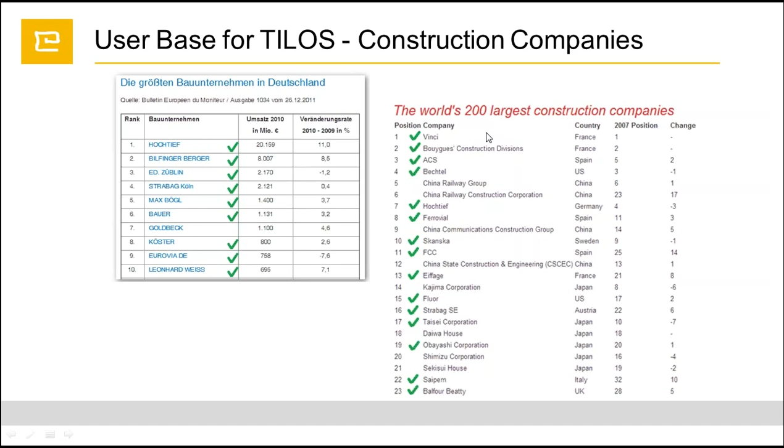We have companies like Vinci, Bechtel, Hochtief, Fluor, Strabag, and so on. So we have a Europe and Middle East customer map. As you can see, we have a lot of customers who have been using TILOS for a long time for their construction projects.

Also the Asia customer map. I see we have a lot of people from Asia and Europe attending today's webinar. We're very glad to see you here.

So, what are the characteristics of a linear project? Well, as we all know, a linear project has an axis where the work is being performed. So in this case we have pipeline, railway, highway, tunneling engineering, and transmission lines. One of the characteristics of the linear project is that we have a repetition of each activity.

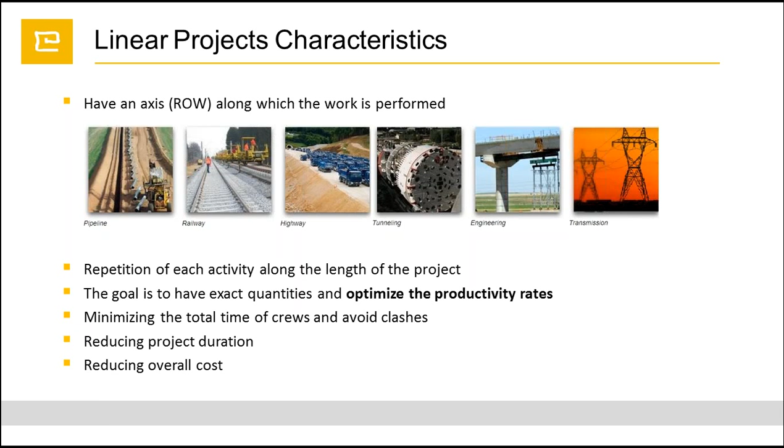So we have repetitive activities which go all along the project, and our goal is to optimize the productivity rate, reduce the project duration, and visualize the project area, which is very important. I'll give you more information later on, and reduce overall cost. Well, to which industry can we actually implement TILOS?

We can implement TILOS on all linear projects, such as transmission line projects, highway, road and bridge projects, railway projects, pipeline projects, high-rise buildings, metro and tunnel projects.

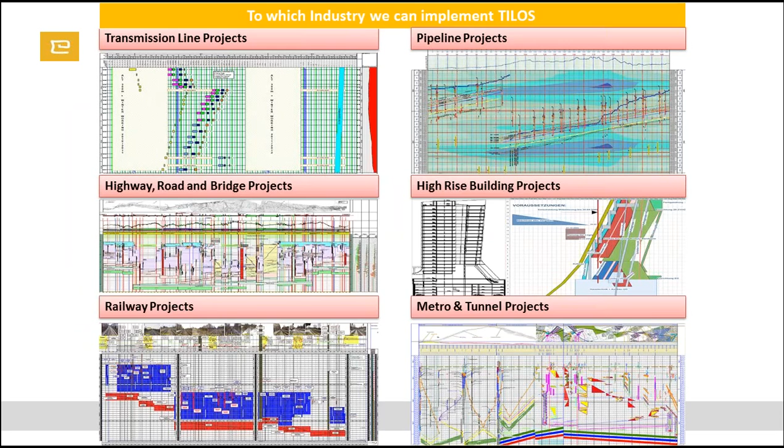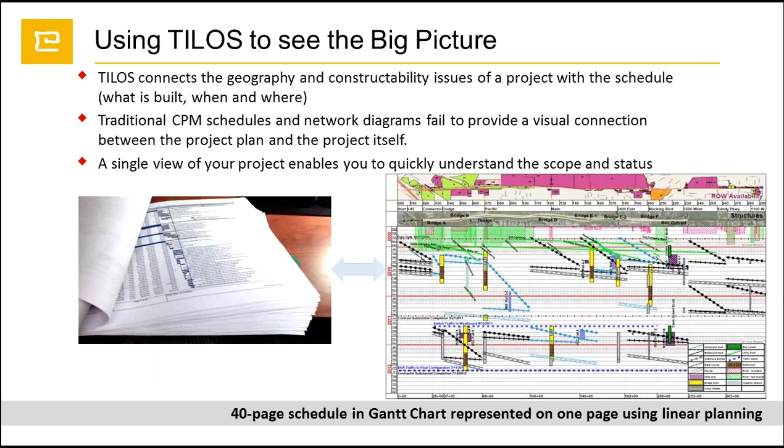One of the biggest advantages, as I mentioned previously, is the visualization of the projects and the reporting. If you can see on the left side, we have a traditional CPM plan and report, around 40 pages, and everything we have in one page in TILOS. So in TILOS, as the Europeans call it, we have every information in a single page.

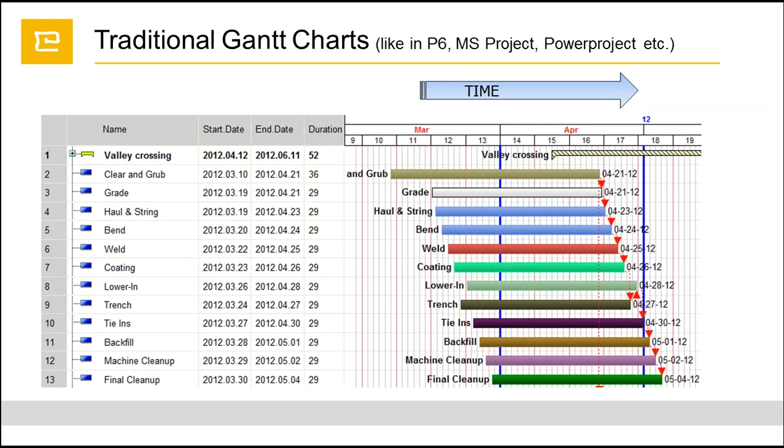Okay, I'll give you the main idea of how we can analyze the TILOS reports and how we can prepare the work. In this slide we have a traditional Gantt chart where we have only one axis, which is time, like in Primavera P6 or MSP or Asta Powerproject. However, in TILOS we have a two-dimensional chainage, which is first the distance axis and the time axis.

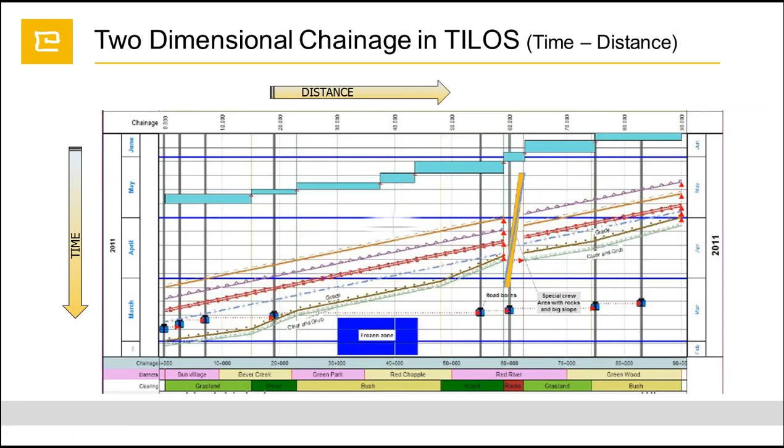So this way we are able to see where our activity is going to be performed and when. For those who don't know how TILOS works, I'll give you a simple example of how TILOS works, and later on we'll go more deeply into pipeline projects.

So we have here our working area where we have two axes. First is the distance axis - this is a 4-kilometer road project, let's say - and we have a time axis which takes 3 months. On top we have a graphical illustration.

So TILOS gives us the opportunity to enter the graphical illustration. Here we have the object, we have a road. For instance, we have a first intersection, second intersection, or crossing, then the river - so it might be a culvert or a bridge.

On top of it we have an elevation profile where we have a road level, where we have a cutting amount - starting from the 0 kilometer until, let's say, 1,700 meters, we have the amount where it should be cut, and the fill amount. So this is the elevation profile we can indicate. This is not graphical - this information is taken from the database where you keep this information. It might be Excel or another place.

So let's say we have first activities, which is the topsoil, and we are starting from the left side of the river, and it will start from 2,600 meters and goes all along to the beginning of the project, and this activity will take 3 weeks. So by this way we are able to see, for instance, when we'll be at a certain point. Let's say at 1,500 meters our activity will have to be done until almost at the end of the second week of August.

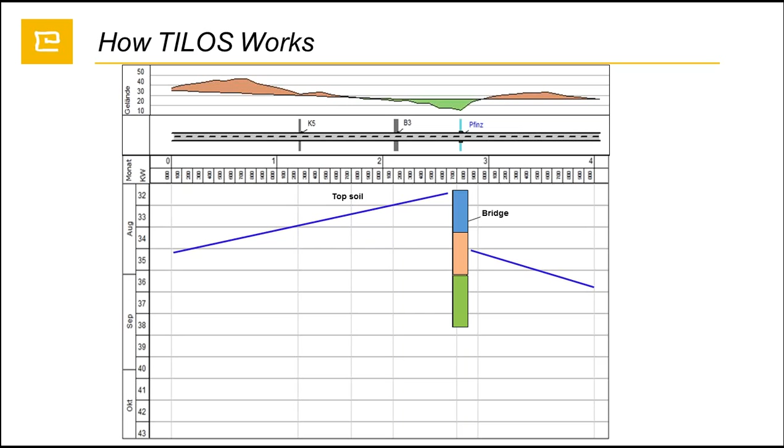Besides that, TILOS we can prepare beside the linear activities, we can do the structural activities as well. So we have here the bridge, and we can show it as a summary task, or we can show it as a detailed bar. So all the steps of the bridge we can indicate here.

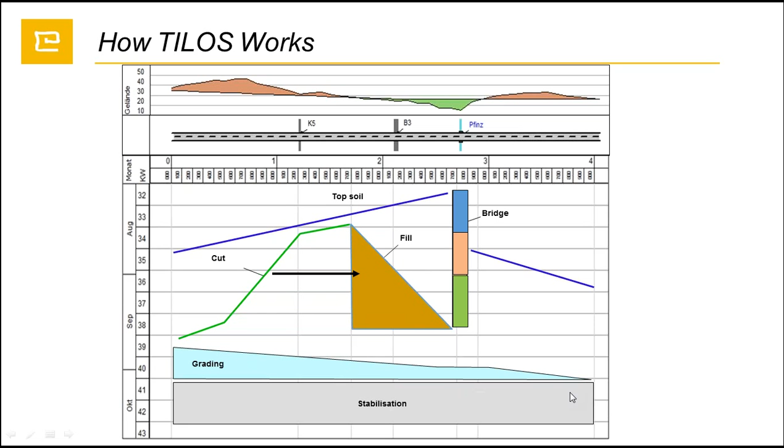So at the same time, we are able to put the hammock task. In this case, we are putting some rectangle here, which gives the understanding that we cannot perform any other work until we fill this area. So this area should be filled until we perform the next activities. And then we have a standard grading, which goes from the beginning until the end of the project, and the stabilization. So simply, this is how TILOS works.

Beside that, TILOS gives us opportunity on clash detection. So as you see, we have here the pipeline sample. We have an elevation profile, we have a distance axis and the time axis. In the middle of the working area, we have a restriction area, which we are able to put, so we cannot perform any other work during this time on this distance zone.

So let's say we'll have one activity, and we can see that there is a clash. This activity is starting from the beginning and ending at the middle of the project. Let's say not in the middle, not in the middle of this area. So we can see that we have here our clash.

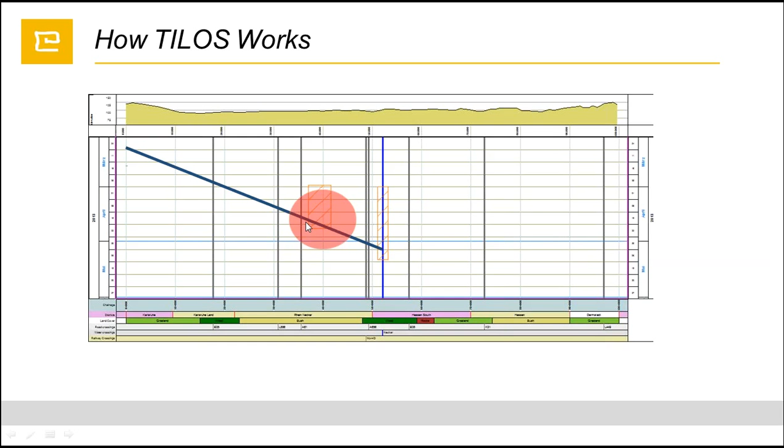However, we are able to, let's say where the project engineers or the project manager decide to postpone the beginning of our activity 1 week later, but as well we can stop our work, we can come to this point, we can stop, later on after this time passes, we can continue our works. However, we decided to just postpone the beginning of the activity, and in the same way we have a second activity.

However, if you look on TILOS, we can see that we have a clash. This is actually the clash detection option in TILOS, and TILOS does not give any options on how we can solve it. However, it's up to the user whether he would like to postpone this activity, whether he wants to reduce the work rate, or whether he wants to stop this activity.

So, moreover, we can give the lag, which actually the traditional CPM gives us as time-based. We can also in TILOS give the distance-based. So as you can see here, we have a minimum distance like a 2 kilometers lag. So between these two activities, these two activities cannot be performed closer than 2 kilometers.

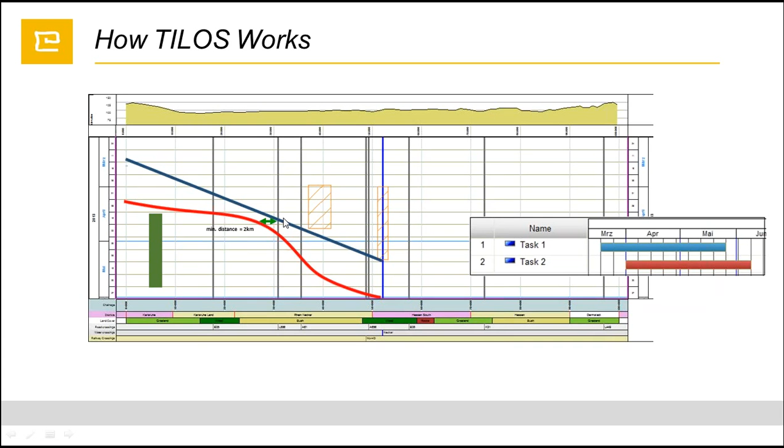Okay. The project controlling. So we have information that we have a clearing activity name, the date, the start date, and the end date, start distance, and the end distance.

Okay. So beside the linear scheduling, it's also available to give the detailed report on the progress. So as we can see here on this screen, we have the main activities. We have sorted main activities. We have a data date. Also the main activities for the grading, clearing, grubbing, grading. We have a progress dashboard where we can see the actual progress, planned, the quantity, actual quantity, all this editable, and we can put any information which we would like.

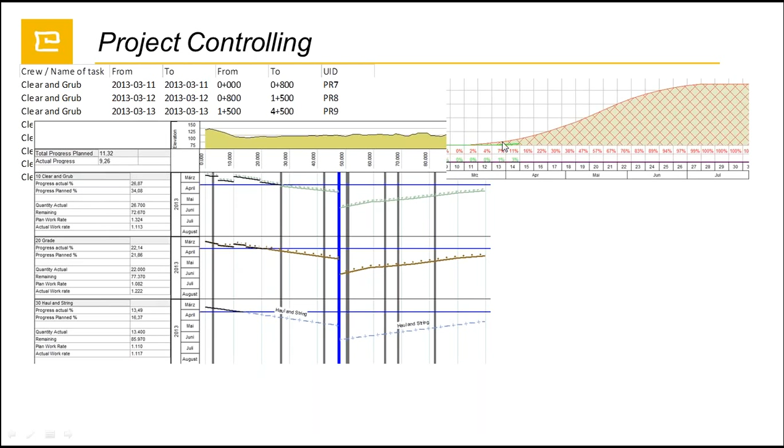Moreover, we are able to provide the S-curves, and we are able to provide the Gantt chart on the distance base, not on the time base, but also on the distance base. So we can see here the distance, and we can see here the information about our activities, which is the planned percentage, progress percentage, the work rate performance, any information which you'd like to see, we are able to display it in TILOS.

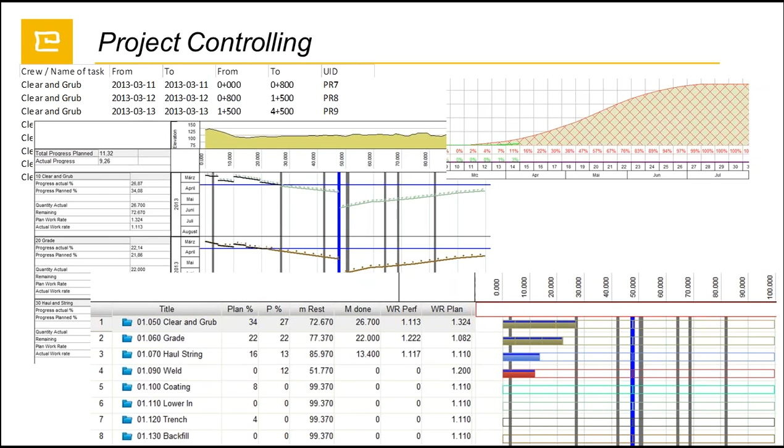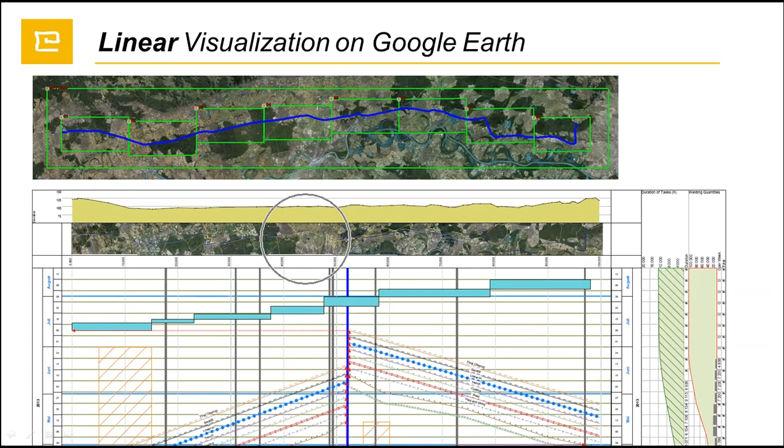Okay, as I mentioned before, TILOS has a GIS module, which is the Google Earth integration. It's called the TILOS Progress Map. We are integrating the TILOS application with Google Earth and getting the reports directly from Google Earth. So in this case, we would like to get the visual view of our project to our working area. So as you can see, we have a graphic illustration of our project on our TILOS working area, and we would like to see the progress.

So what is the progress monitoring on Google Earth? Well, it is the ability to see the progress, to see the visualization of our actual progress on our working area. So let's say we have a blue line, which is our right of way, where we have our working area. Below we have a TILOS working area. So we are indicating the main activities. So these slim lines are main activities, which go all along the project.

So let's say on Monday 22nd of April, our crew is starting working here, or our activities are going to be performed over here, over there. The highlighted parts are where our actual crew is working. Then on Monday, May 6th, we can see that our crew moved from this point to this point. So I'll just repeat it. We're able to see.

Okay, great. Beside that, we are able to show the cumulative way. So what we have here is two crews, which are starting from the beginning of the project and the end of the project. And we are able to see that the highlighted parts are actually performed parts. And we have the rest part where we will have to do our work.

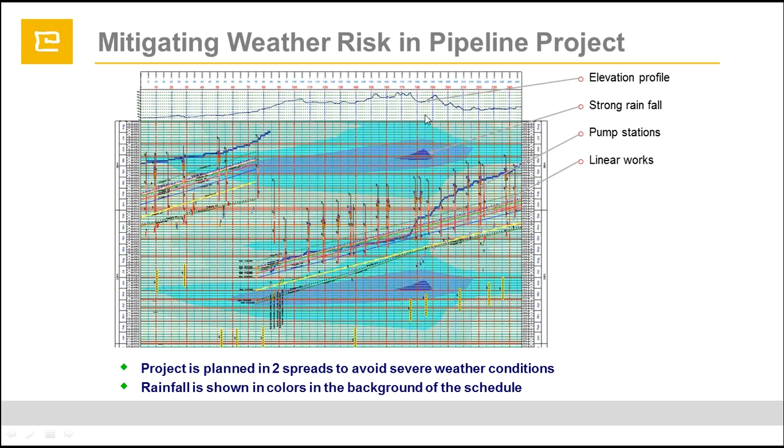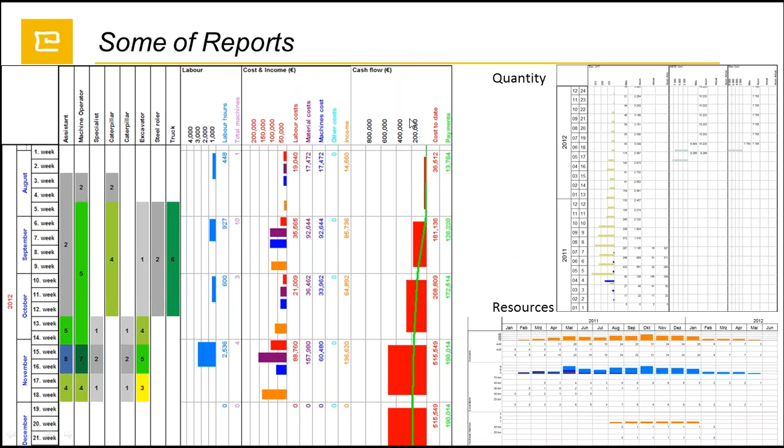Okay, beside that, we are able to show in one page the reports, the histograms, and reports such as the labor report, resource report. So this can be time-based or distance-based as well. So we have here the labor information, the cost and income information, the cash flow, the quantities, resource allocation as well.

TILOS has quite a good data exchange model. We are able to get data from the clipboard or from Excel. Moreover, we can get the information from the most used planning tools such as Primavera P6 or Microsoft Project or Asta Powerproject. So this way, if you are mainly using Primavera, you can use TILOS at the same time as well.

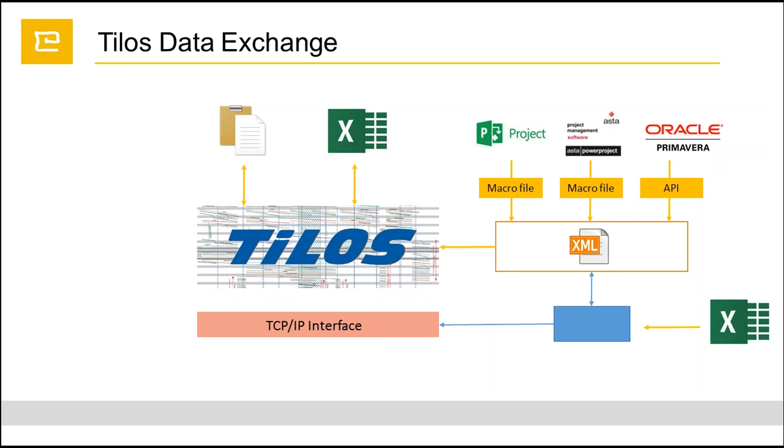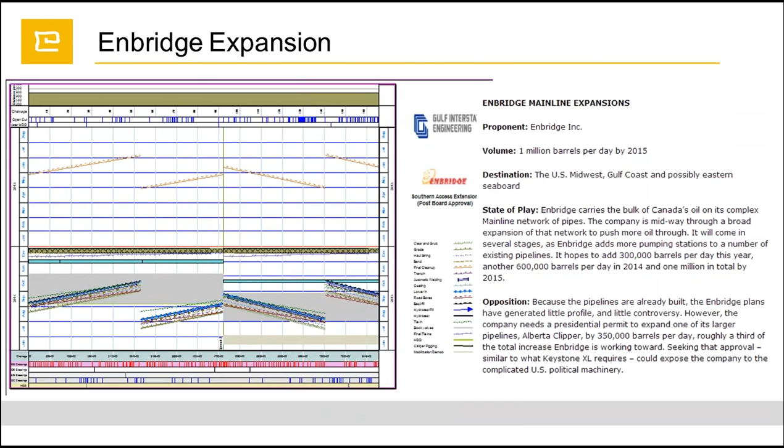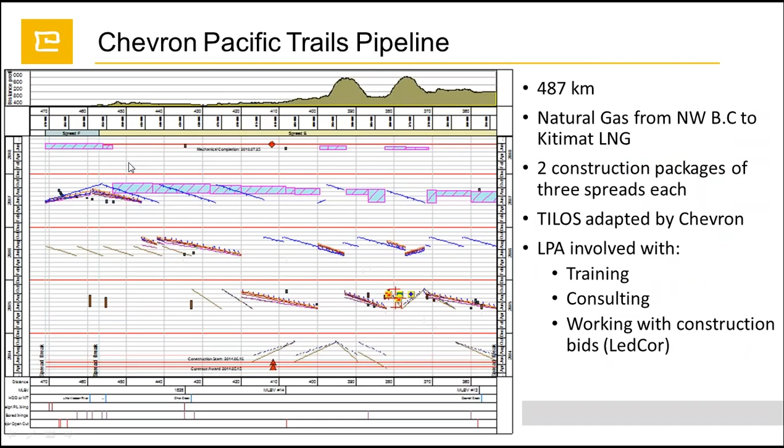Well, I'd like to show you some of the pipeline projects which are actually being used by TILOS. So this is the project which we are using. I'll give the short information, I'll just be going through it. So this is a pipeline project in Canada. We have an Enbridge expansion, the Chevron Pacific Trails pipeline. So as you can see, we have the distance and the time, all activities performed all over our distance.

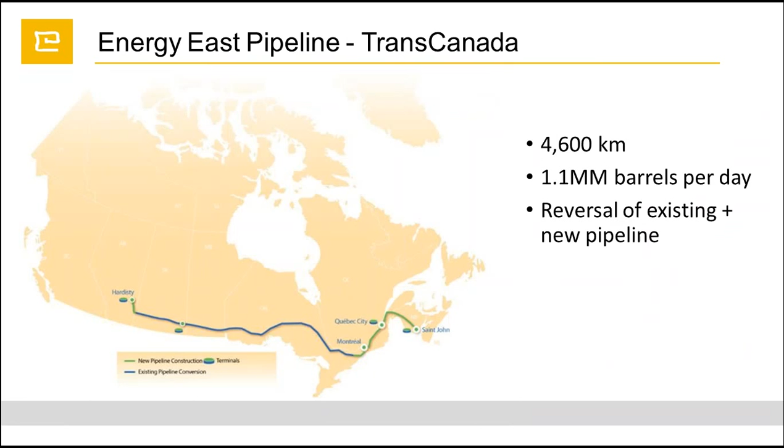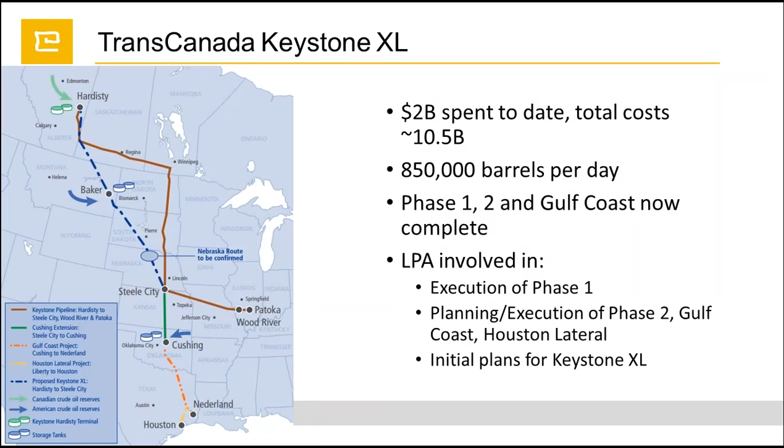We have Energy East Pipeline Trans-Canada, which is one of the biggest pipeline projects. And we have a Trans Mountain Kinder Morgan pipeline project, the Northern Gateway, Trans-Canada Keystone. Czech Republic, we have a Gazela gas pipeline.

Well, moreover, let me just give you the short information about in which project stage we can use TILOS. We can use TILOS in any project stage. It can be feasibility studies, overall plan, production plan, special studies, and also we can use it for pre-designing, for the tendering, for the planning, procurement, execution, or even for the claim analysis. And it can be owned by the owners, engineering companies, contractors, or the subcontractors.

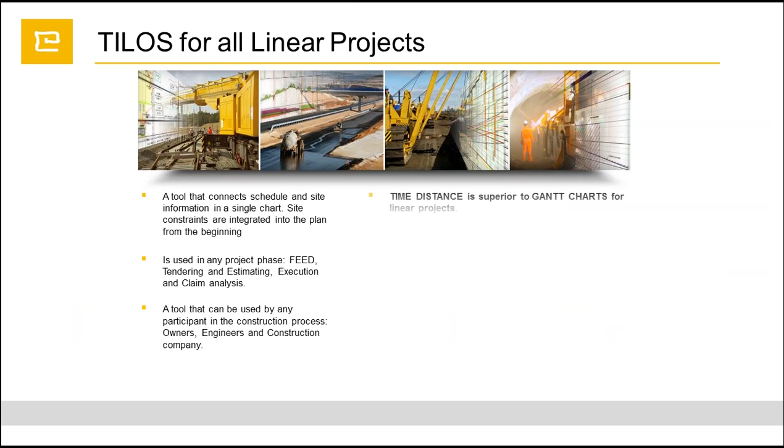Well, this is pretty much all about the first part of my presentation. Right now I'll switch to the demonstration part. Okay, so we have a TILOS interface, we have a ribbon, we have a TILOS Explorer for quick navigation. We have a properties bar below, and we have the main working area here.

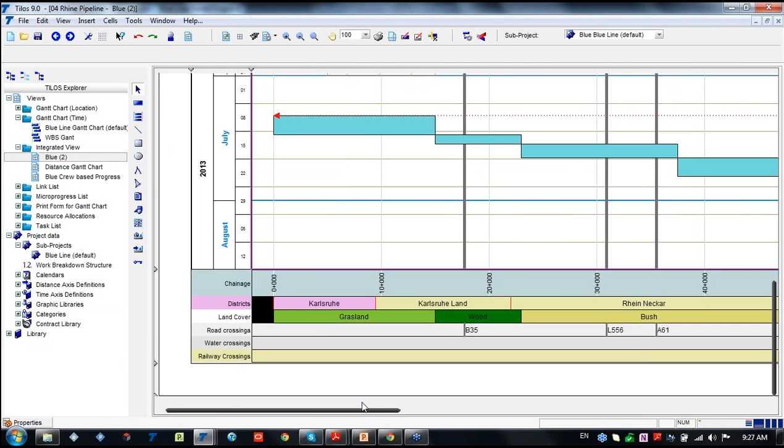So as we can see here, we have the elevation profile. We have a distance, which we can see is a 100 kilometers project. Then we have a time axis. Moreover, we are able to show the sectors, the districts, in order to make our work easier. Or for instance, if on the same project you have dedicated subcontractors working on it, we are also able to show it, so we can divide the works on the section districts. All this information is editable according to your wish or to your requirements.

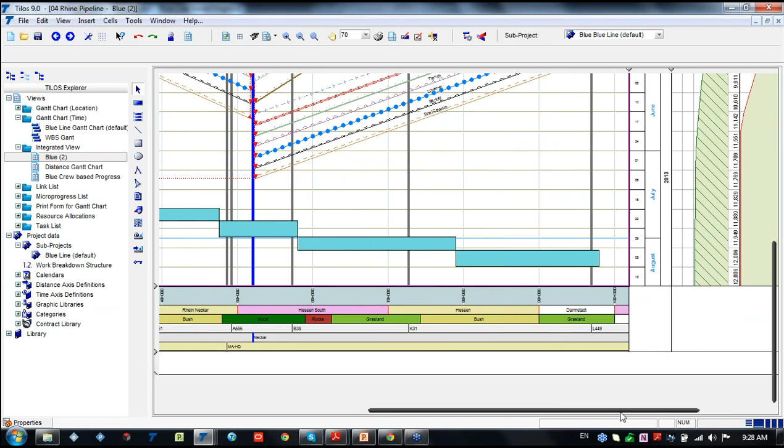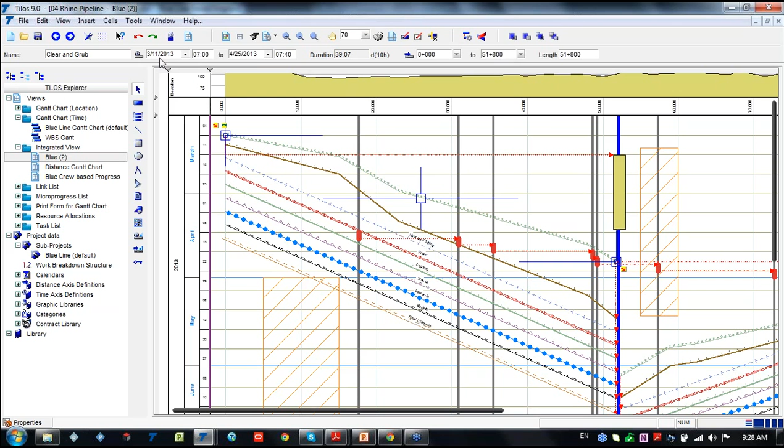We have a report, which is the duration of the task reports at the S-curve. Also the welding quantities here. It can be cumulative or not. So we have the main activities here first, which is the clearing and grubbing activities, and we can easily see from where to where our activity is going to be, the duration of the activity, the start date, the end date, even the hours. So on the properties bar, we're able to see more information, such as to which WBS it belongs, the task ID, which calendar it is using.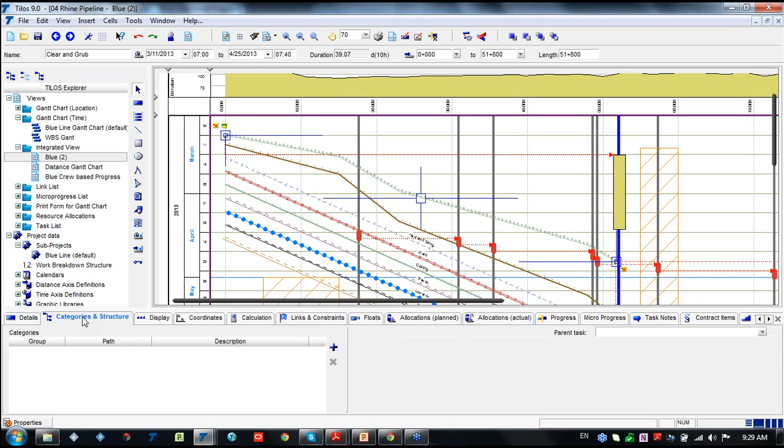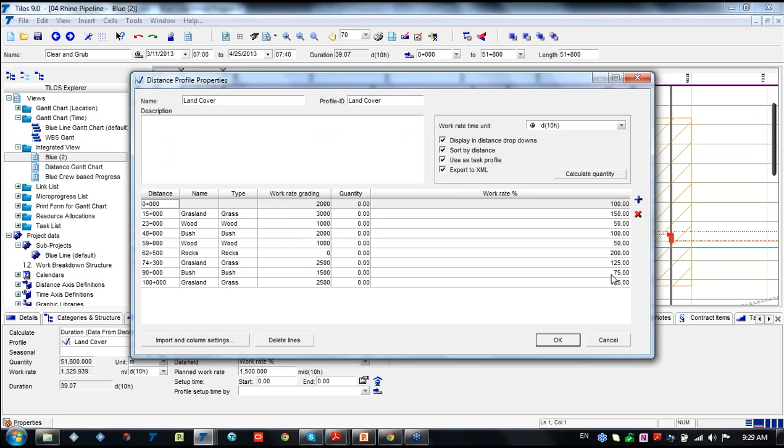The calendars are actually editable. You can edit your calendar according to your requirements. Then we have the categories and structures information, the display information. This is a task which we can actually edit. All these cosmetic works are done by the user. The calculation method, we have several calculation methods. So in this case, it's getting the information from the profile data, which is the Land Cover, and we have all information over here. We have a work rate, the quantity, the work rate percentage. Okay. This way, we are able to see the several calculation methods: work rate, duration, length, duration speed from the profile data, the duration from the distance profile, or from the sector profile.

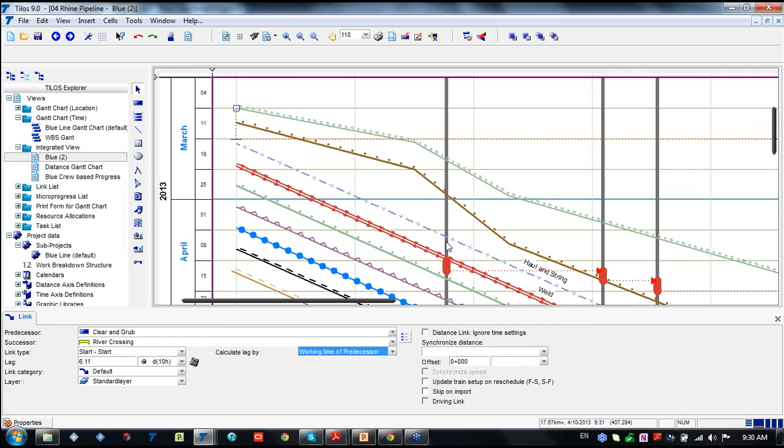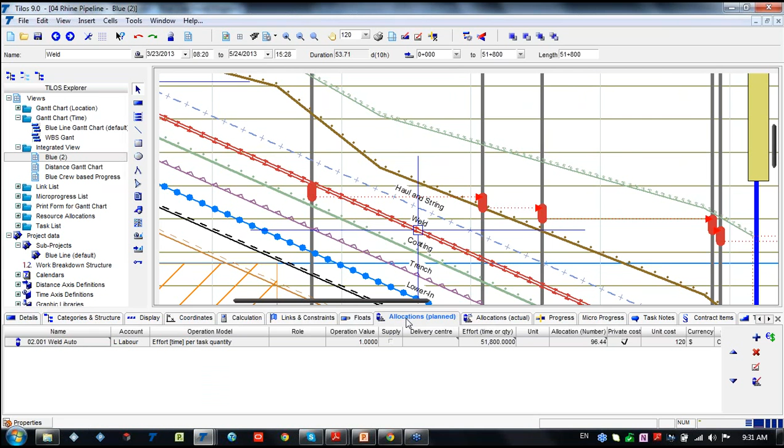The next activity is, for instance, the welding activity. We are able to see the coordinates as well here, not only from the top, but from the detail bar as well. We can see our allocation, resource allocation, actual. I'll show you right now. We don't have any actual, but I'll show you the actual one. The progress methods, some of the progress methods, such as percent split, the quantity split, the distance split, the task steps, percent simple, quantity simple.

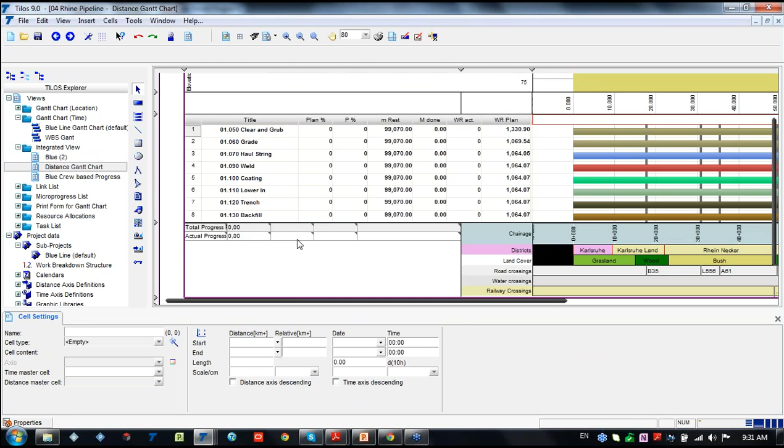Beside that, we have a traditional Gantt chart, but this time which is distance based. So we have main activities, or any activity which you'd like to show, no problem, it's possible. And we have our activity. Also, we have indicated here our sector profile and the progress, but this time we don't have any progress, and I'll show you in a minute the same project with entered progress details.

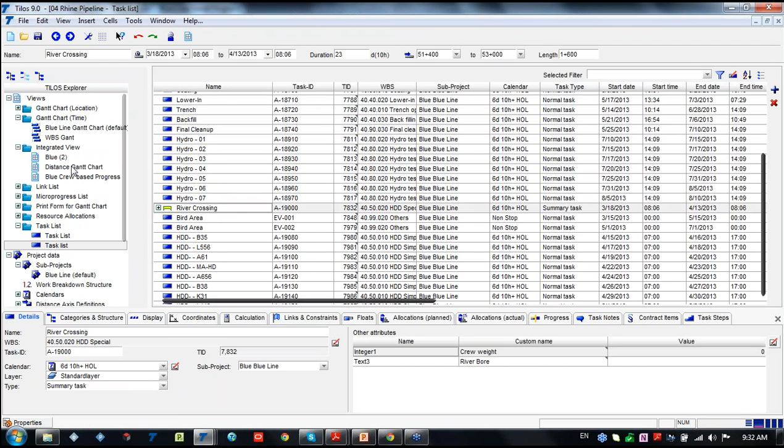So main task list, we're also able to see our task list here. If we have any WBS or summary activities here, we're also able to show it. The summary task on our time distance area looks like this. So this is a river crossing.

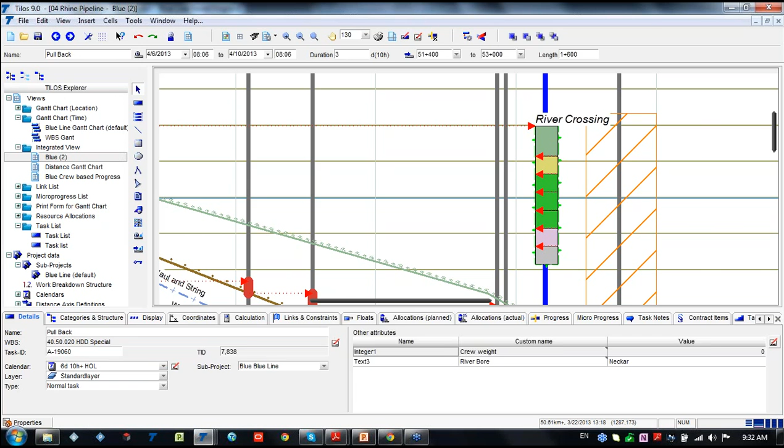Okay. So once you would like to see the detailed information, we're able to see it. So for instance, right now, this is mobilization activities, this is pilot hole, reaming, and so on. So once you don't need to see it, you can just, oops, not that way. You can just switch it off, or hide it if you would like to.

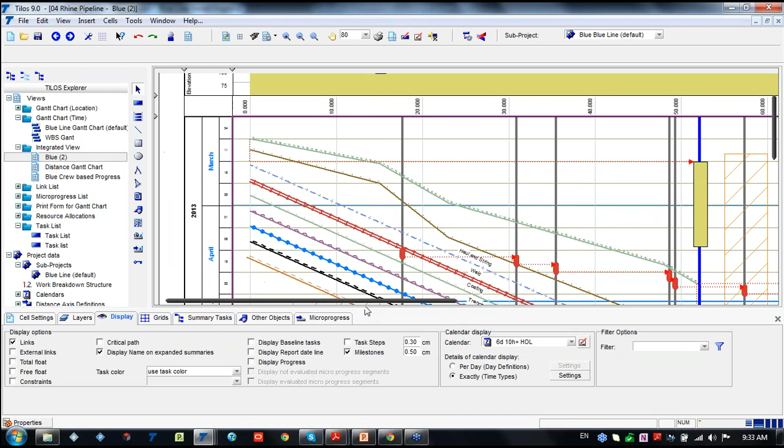Okay, let me show you right now the example with the progress entered. So as I've showed you previously, we have a dashboard here. We have information about the activity. We have entered our activity. We have a data date here. We have entered our baseline and the actual information.

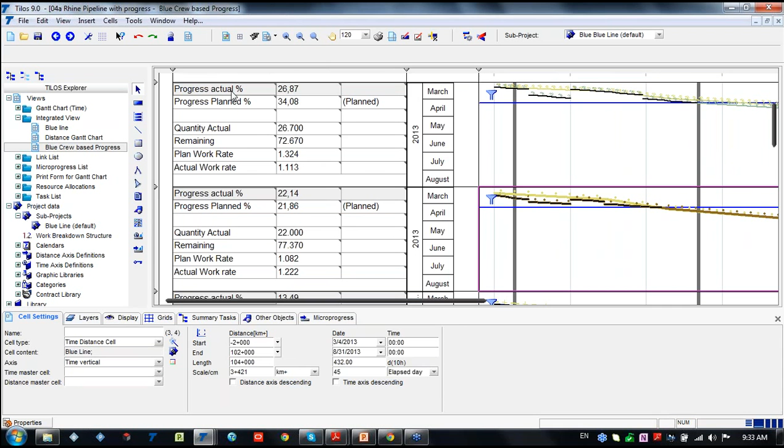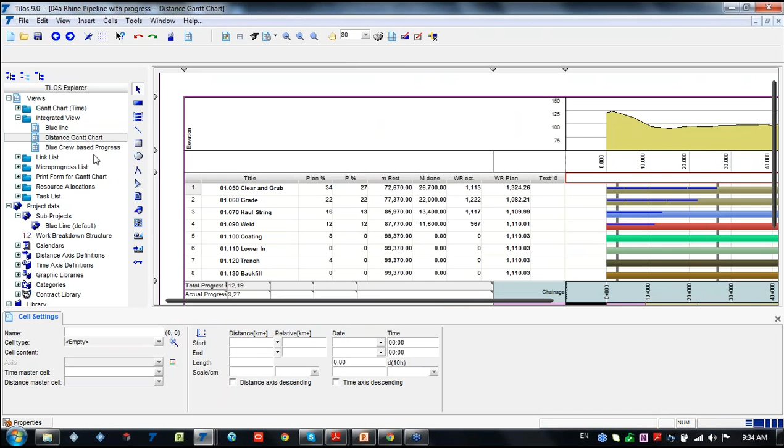So by the dashboard, we're able to see what is progress actual, progress planned, then the quantity actual, or the remaining part, the work rate. So all information is available in order to prepare good planning or scheduling. On a distance Gantt chart, all this information is shown simultaneously. For instance, let me show you how it actually works.

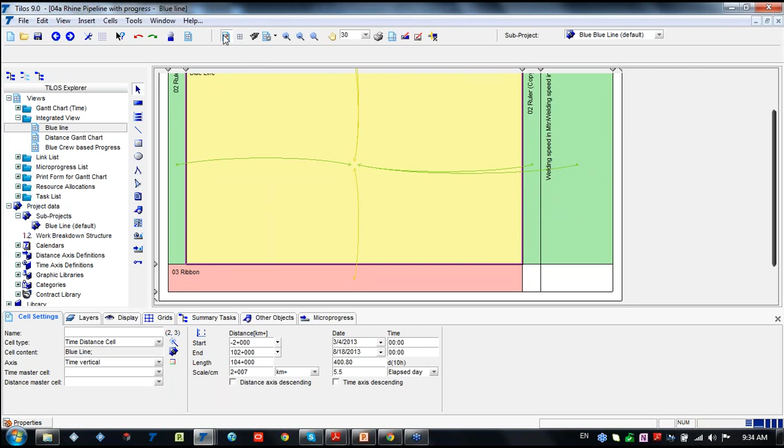All right, by this view, we are able to see that all the information which we are entering on our working area is synchronized with the elevation profile, with the data, with our histograms. So if you change any information here, for instance, it will also be changed on our Gantt chart.

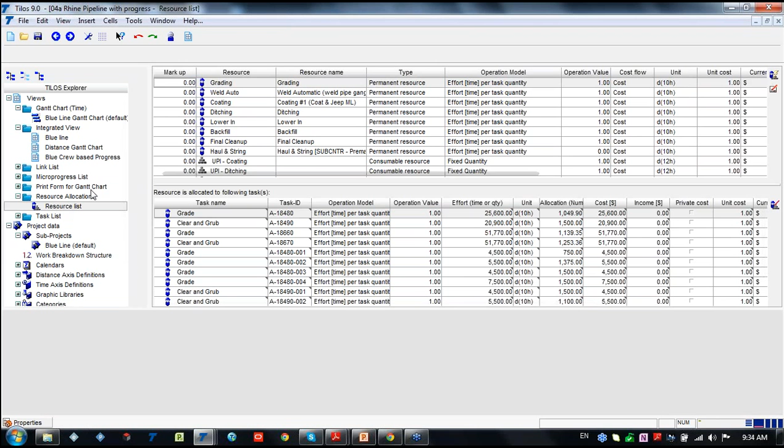Besides that, we have a traditional Gantt chart, which is time-based. Okay. We have a resource list. All this information as well we can edit. This is up to you. The calendar information. We have calendar information. We can indicate the non-working times, some exceptional days such as holidays.

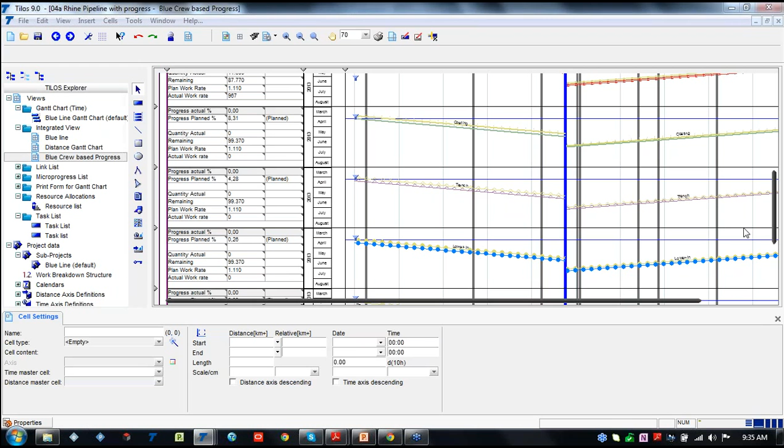Do you have any questions until now? Okay, I see no questions here, or you're still typing.

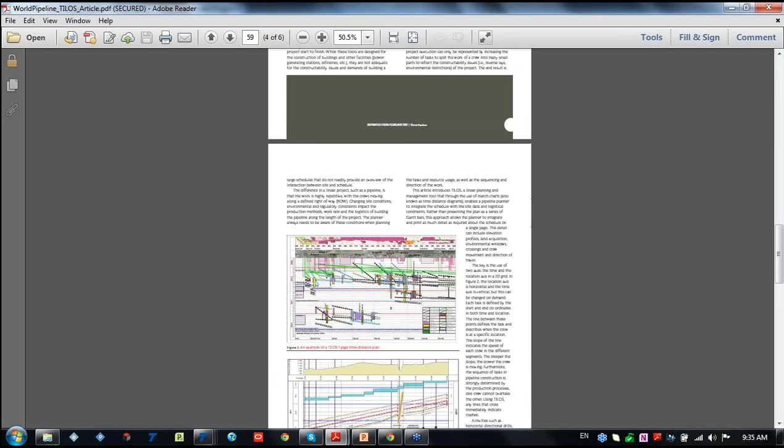Well, TILOS was introduced in the World Pipelines magazine. So if you would like, we are able to share it with you in order for you to have some understanding why we are using TILOS in pipeline projects.

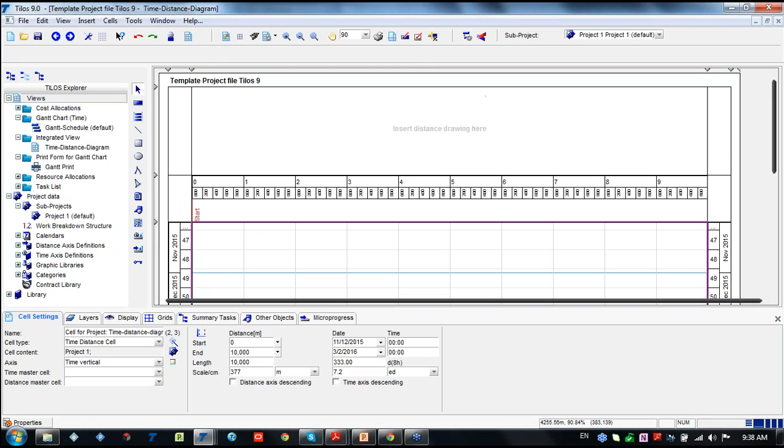So what we have here first is a general template where we have already predefined the distance according to how we set it up. So it's starting from 0 and it ends at 10,000 meters. We have a time axis on both sides. We have a legend here.

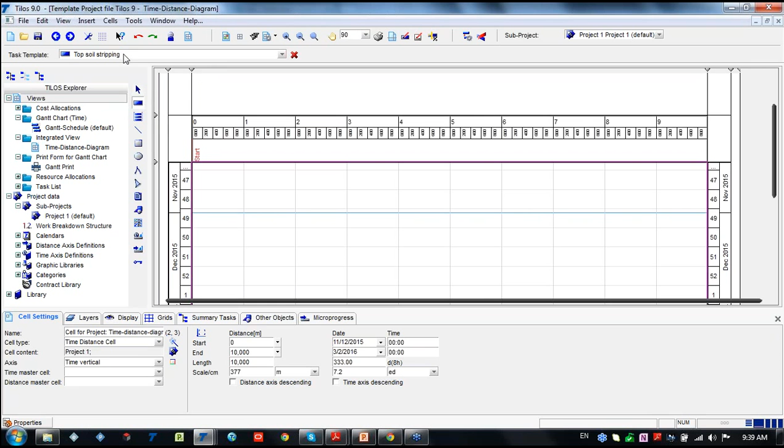So the question was how we can add the activities. We can add the activities by clicking on insert task, or we can even insert a task group. So if you have a repetitive activity, for instance, let me first add the task. Once we've added the task, we can select the task over here.

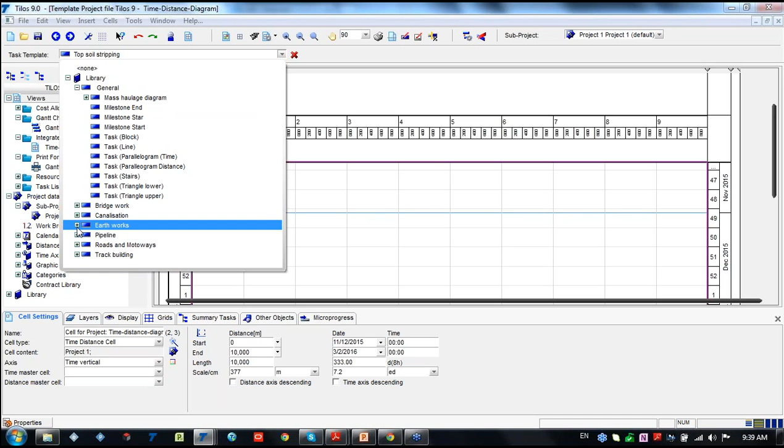We have a task library. This library we actually have from our template, but you can edit it, add to it, remove from it, or adjust it as you like. So let me choose from the earthworks, let's say the topsoil stripping. By dragging my task, I'm able to insert my task.

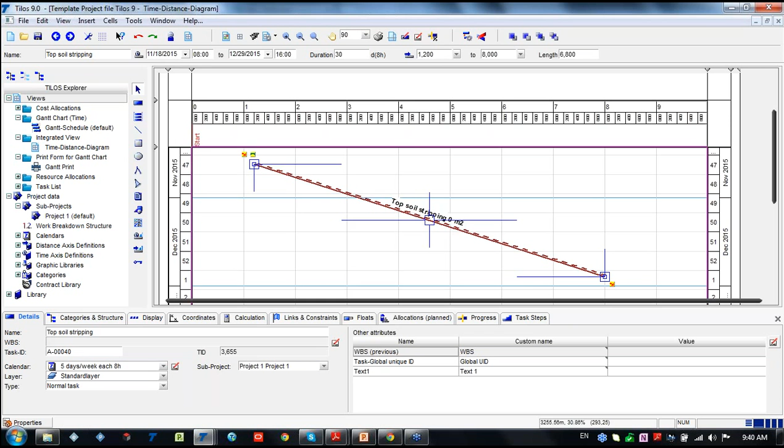Besides that, all this task information, like the duration, can be 30 days, so it will adjust automatically. Or, for instance, starting not from the 0 kilometer, but from 1,200 meters. So all this information is editable, or we can even change the end date. It might be in February 2016.

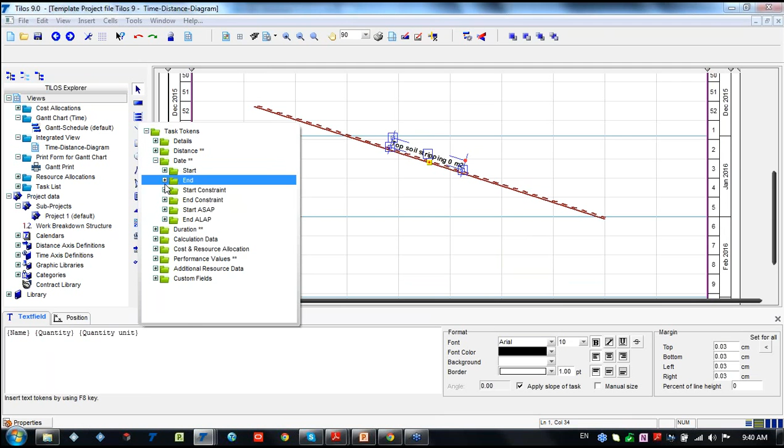Okay, so what we have here is the information about the task. The task annotations are also editable. These task annotations can be about the quantity, if you have any quantity on your task. It can be the name, the end date or start date. Let's say we have the end date as the schedule.

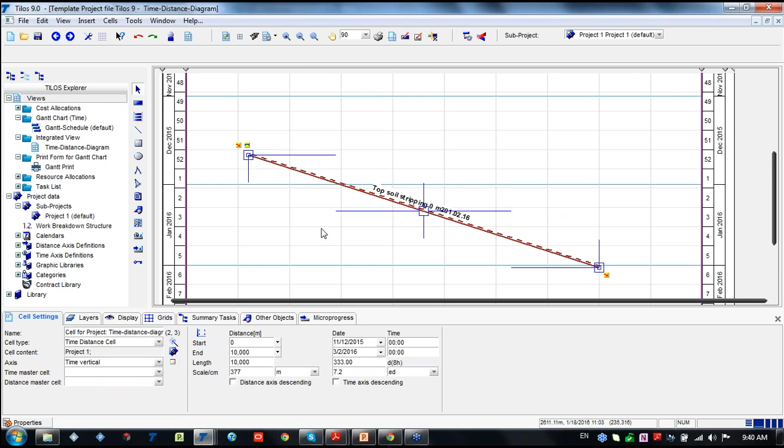Okay, so right now we have an end date, so it will end on the 1st of February 2016. Then we have, as I said before, task groups. So once we would like to enter the task groups, let's say we have a predefined task group. It can be the path, it can be a canalization task group, and we would like to enter it as, let's say, the distance profile.

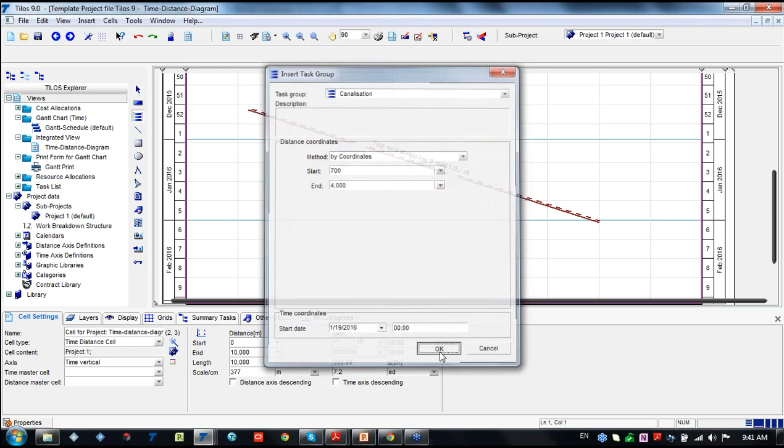So in this case, we don't have important location points, so we'll not use the distance profile, but we'll use coordinates. So let's say we're starting from 700 and we'll end at 4,000 meters. Okay, so once I've entered it here, where I have task groups, I can edit it, I can remove it. It's all up to you how you would like to have them. Okay.

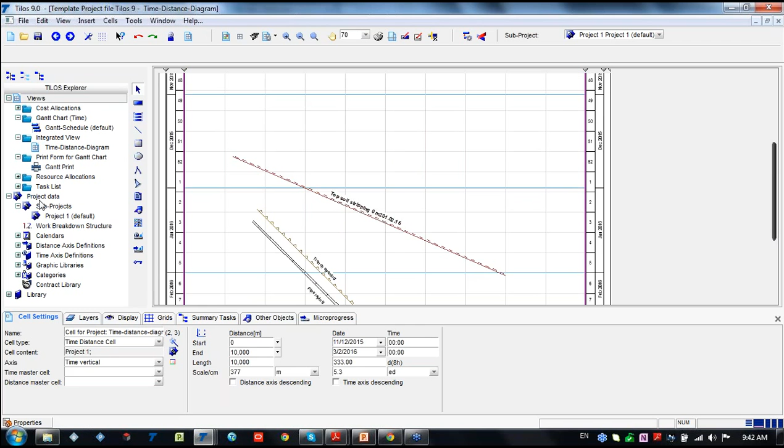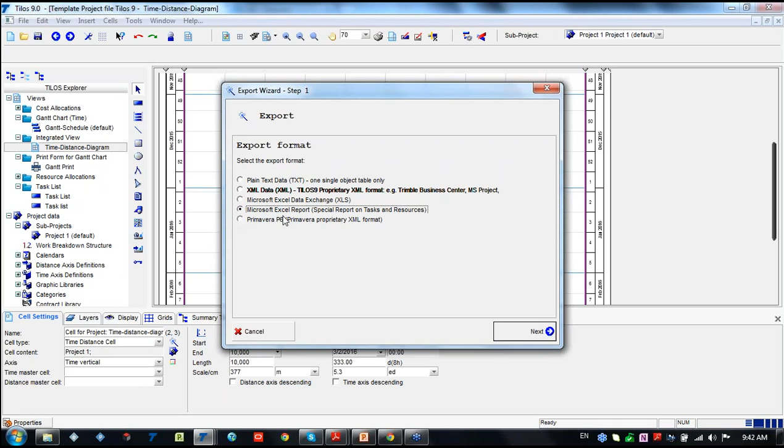Mr. Ibrahim asked me how we can export the information to Excel. We can export it via File and Export. We have options to export as Primavera XML, to Excel, Excel data exchange, XML for MS Project or Power Project, or as plain text. In this case, I would like to have an Excel report, so I'd like to export a template file.

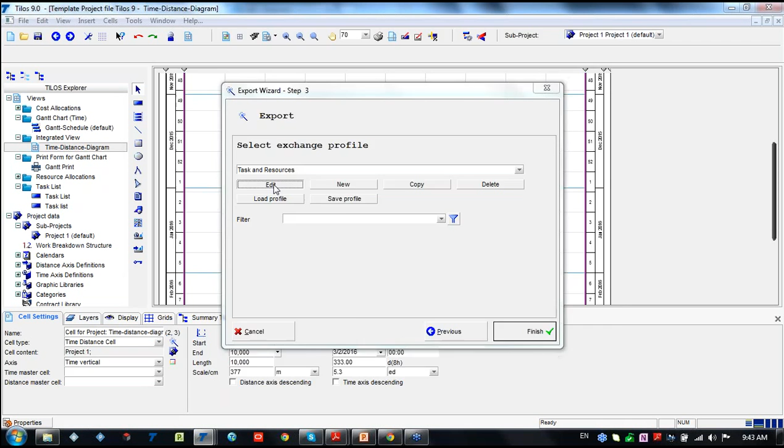I don't have any template file here, so let me create one Excel file. Okay. So in the export information, we can select the exchange profiles, the information which you would like to see. You don't need to export all information. I don't need baseline information or calendar information, so I'll not choose it.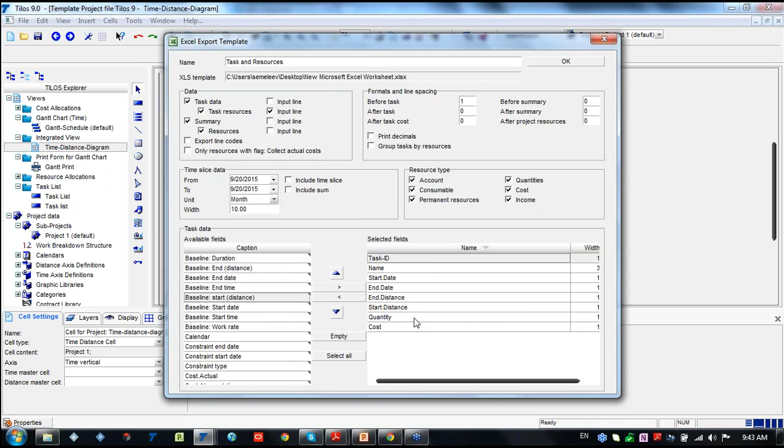So what we have here is the task ID, the name, start date, and distance. If it is cost loaded, we can export the cost or the quantity. Okay. So we finish it, and let me see if we have done it.

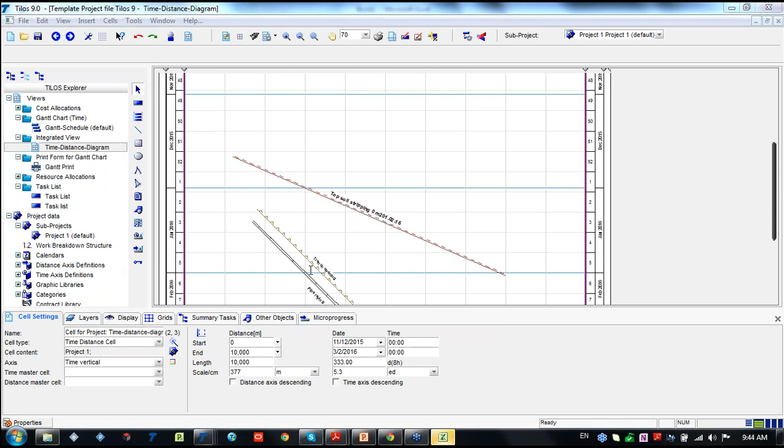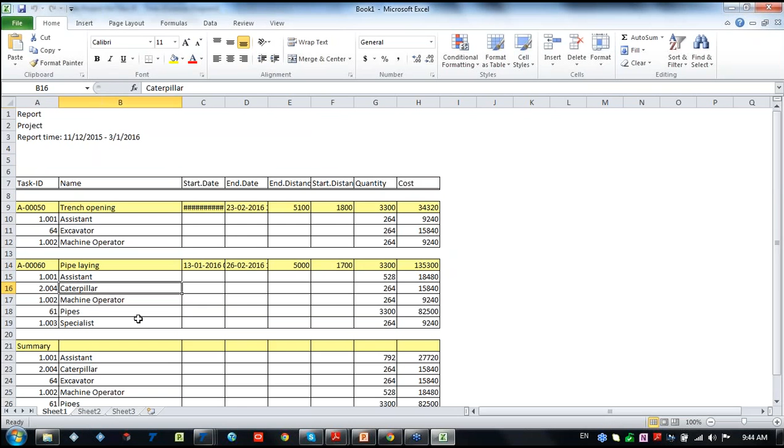So right now we can see that we have exported the information to Excel. We have trench opening, pipe laying, and also the summary. Here we have the resources information, the task IDs, start date and end date, the distance, and the quantity. Okay, I think we have another question.

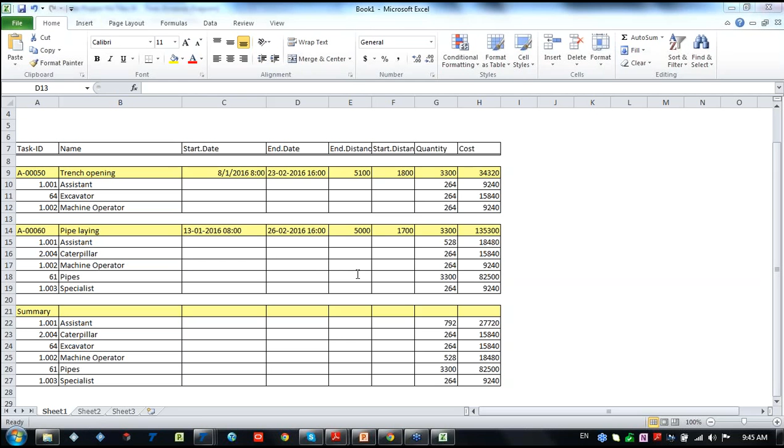Mr. Zahid asked whether we can first make the WBS and then the activities inside it, like in P6, and then add all activities here. No problem. If you have done your planning or scheduling in P6, you are able to get it into TILOS as well. With all the information you have in P6, you can export it and import it into TILOS.